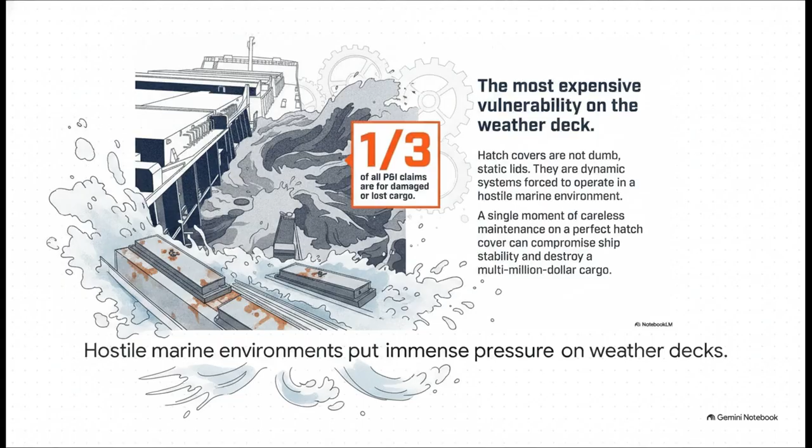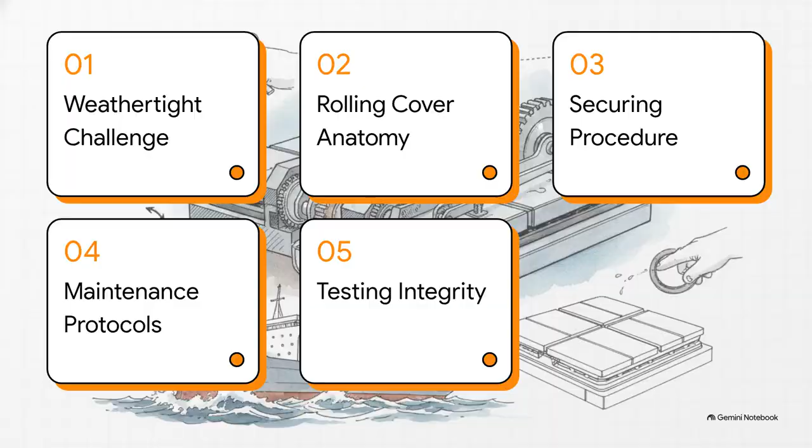So here is our roadmap for today. First, we'll cover the weather tightness challenge, then we'll break down the anatomy of rolling covers. After that, we'll walk through the specific securing procedure, lay out the essential maintenance protocols, and finally, look at testing weather-tight integrity. Starting right off with part 1, the weather tightness challenge.

Before we start looking at the heavy machinery, we really need to know our ultimate objective. The 1966 standard defines weather tightness as the condition where, in any sea conditions, water will not penetrate into the ship. Now, I want to be super clear here. This is not some lower standard than being watertight. It's actually a highly specific requirement because the ship has to maintain this seal even during the intense relative movement between the hatch covers and the coamings, which is that raised rim around the hatch.

And listen, failing to meet this standard puts ship owners in serious legal peril. As legal precedent clearly points out, you generally cannot rely on the peril of the sea defense in a cargo damage claim if you don't have hard evidence of diligent maintenance. Basically, you can't just blame a rough ocean if your inspection paperwork isn't totally flawless.

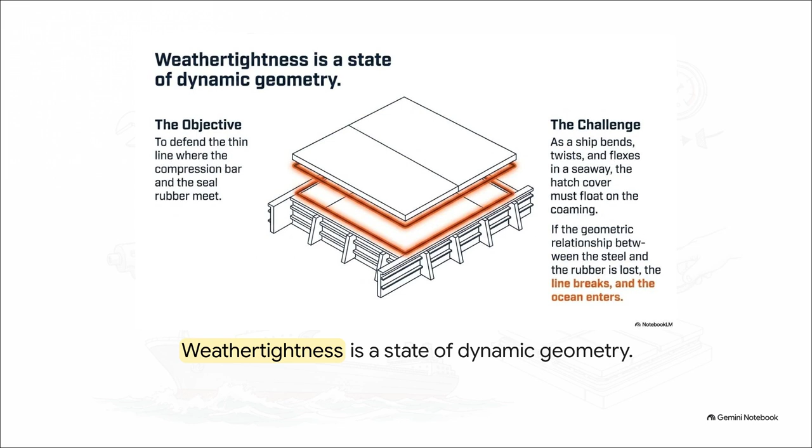So weather tightness is really a state of dynamic geometry. As a massive steel ship bends, twists, and flexes in a rough seaway, the hatch cover essentially has to float on top of it. The objective is to defend that incredibly thin line where the steel compression bar and the rubber seal meet. If that precise geometric relationship gets thrown off, the line breaks and the ocean pours in.

Moving on to part 2, the anatomy of rolling covers. Let's break down this physical arsenal. Rolling covers feature a pretty complex system of parts. On one hand, you have securing mechanisms like your quick-acting cleats and top cleat assemblies, and those act as the locks for the shield. Then, on the other hand, you have the drive units, like the rack and pinion system, acting as the muscle to physically roll those heavy panels open and closed. Every single one of these components has to be perfectly aligned for the whole shebang to work.

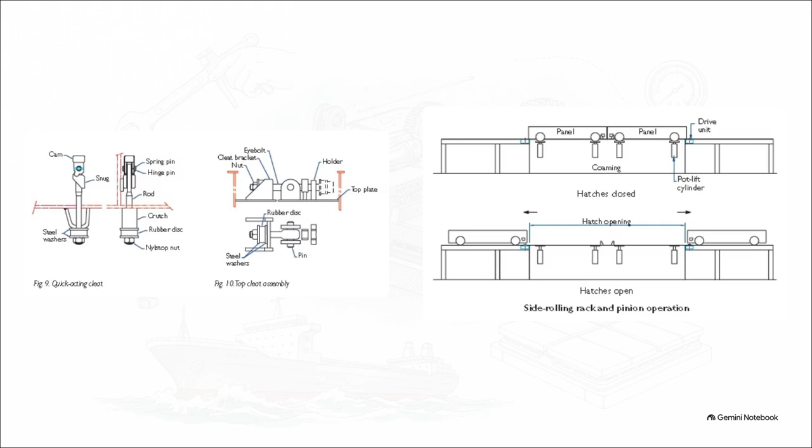All right, part 3, the securing procedure. All of this heavy machinery is completely useless without absolute human precision. And here is a wild fact. Screwing cleats down hard will absolutely not ensure weather tightness. I know, it sounds counterintuitive, but it's a dangerous, widely held myth in the industry. Actually, no amount of tightening the cleats beyond their correct position will improve the seal. Why? Well, because the covers are factory tested without engaging the cleats at all.

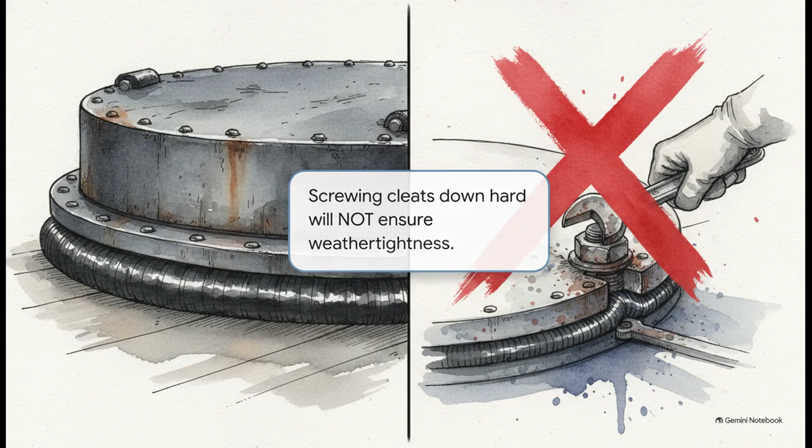The sheer weight of the hatch cover itself is enough to create the required rubber gasket compression. The cleats are literally only there to protect against excessive movement when the ship rolls. So you're probably wondering, how do you correctly establish that baseline compression? Well, it comes down to a highly specific 6-step securing procedure.

1. Close the hatch and secure it for sea. 2. Place the cam of the cleat in the socket as if you're going to lock it, but leave it unlocked. 3. Adjust the locking nut until the compression washer just barely touches the underside of the coaming. 4. And this is absolutely crucial, turn the nut exactly 1 full turn to achieve the desired tension. 5. Do not over-tighten it. And 6. Protect the thread.

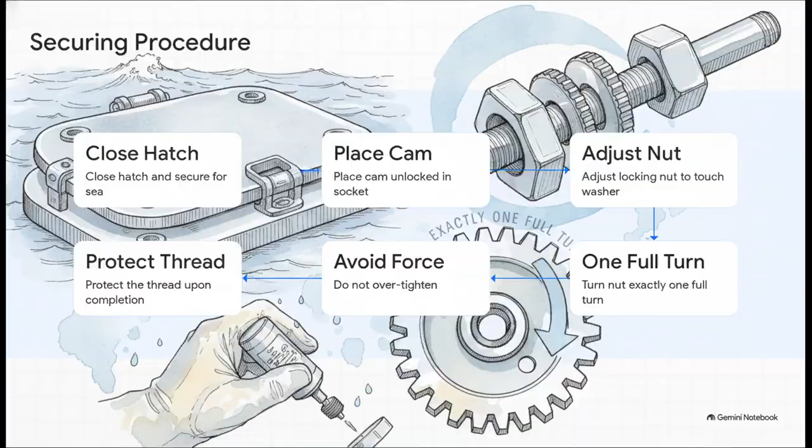So really, the key takeaway here is that micro-precision of a single, exact full turn. Nothing more, nothing less. Let's jump right into part 4, essential maintenance protocols. Maintaining this dynamic geometry is an ongoing battle against wear and tear across several critical points. For your rubber seals, you've got to constantly check their contact with the compression bars.

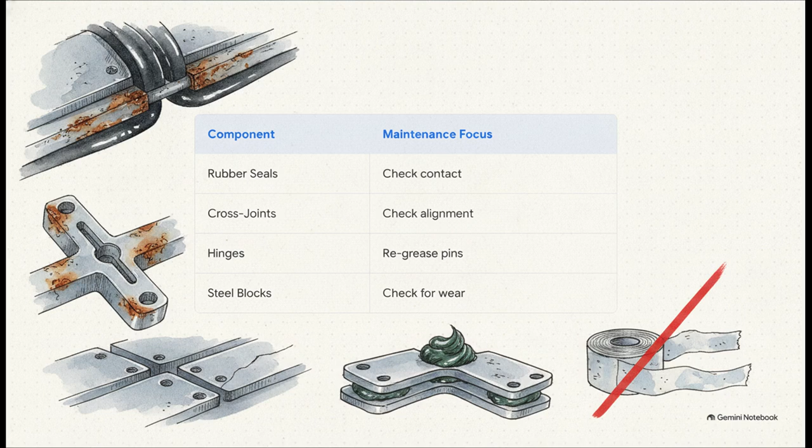For the cross joints, you're inspecting for structural corrosion and proper alignment. Hinges need their pins regreased, and you have to check for weld cracking. And for the steel-to-steel inter-panel blocks, you want to check the locators and top plates for wear. Oh, and a really quick note from the experts, using hatch cover tape offers a total false sense of security. It's just a temporary fix, definitely not a replacement for this rigorous maintenance schedule.

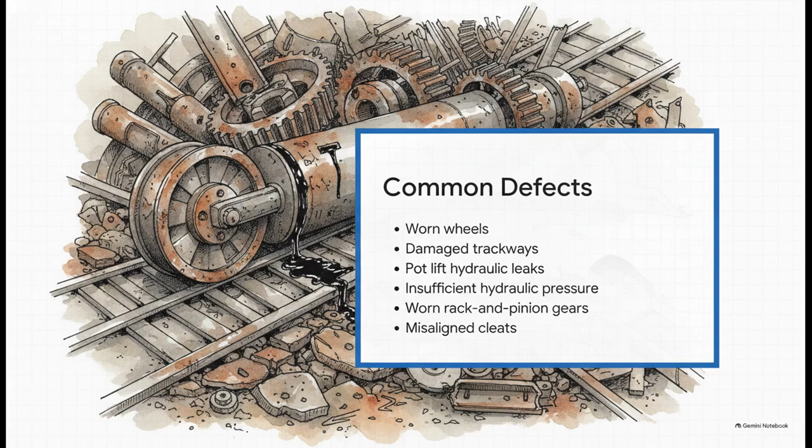When this maintenance gets neglected, you rapidly run into these common but catastrophic defects. We're talking worn wheels, damaged trackways, hydraulic leaks in the pot lifts that cause uneven lifting, insufficient hydraulic pressure, worn rack and pinion gears, and misaligned cleats. Any single one of these defects throws off the incredibly tight tolerances required for a good seal. Just one moment of careless maintenance here can compromise the entire cover.

Finally, Part 5, testing weather-tight integrity. After securing and maintaining the hatch, the crew has to empirically prove that the defense actually holds. Now, traditionally, the industry relied on methods like looking for daylight in a pitch-black hold or the high-pressure hose test. But ironically, the hose test poses a massive risk of flooding the cargo if there actually is a leak. That's exactly why the industry is moving away from those older methods and strongly favoring modern advancements, specifically ultrasonic testing.

During an ultrasonic test, a transmitter is placed inside the cargo hold, switched on, and then the hatch covers are fully secured. That transmitter emits ultrasonic waves that will leak through even the absolute smallest structural apertures. Then, an operator out on the deck uses a receiver to detect any of that high-frequency sound leaking through the seals. The advantages here are just incredible, which is why it's the preferred testing method. It identifies the exact location and extent of a leak.

But even more importantly, it indicates the unseen compression status of the rubber seal. If the compression is good, you know for sure the rubber will be able to compensate for the ship's movements out at sea. Plus, it's a super quick, one-person operation, and best of all, it can be done perfectly whether the hold is totally empty or packed to the brim with valuable cargo.

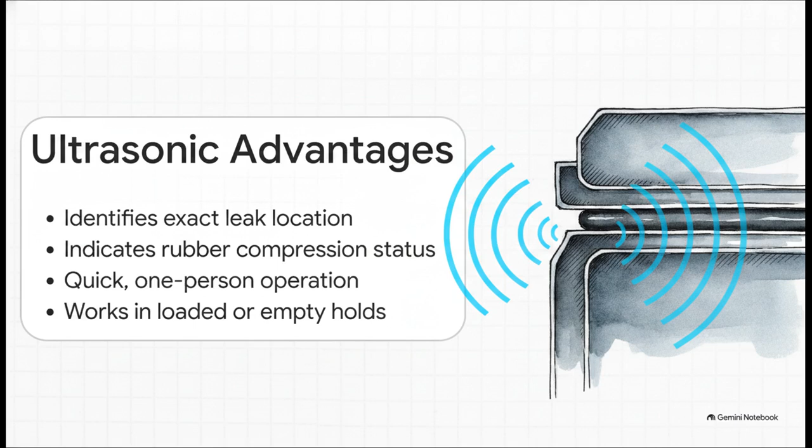So we've broken down the key parts, the strict procedures, the maintenance, and the testing. But I want to leave you with this final thought. As ships grow larger and seas grow rougher, is your thin line of defense truly secure without the rigorous documentation to prove it? Remember the ISM code. All this mechanical knowledge means absolutely nothing if you don't have the maintenance logs, the test reports, and the work specs to prove your due diligence. Ultimately, it all comes down to human responsibility.